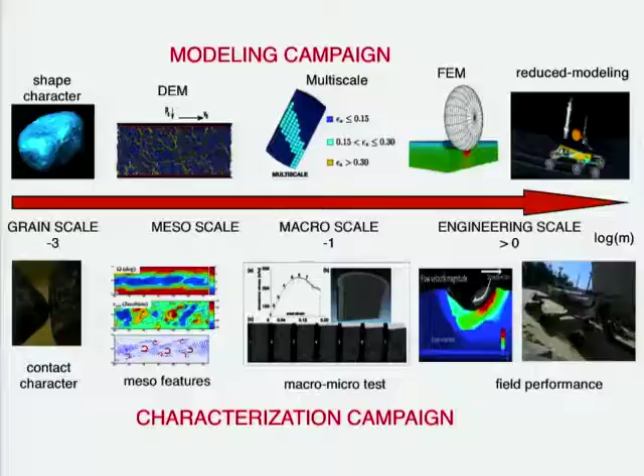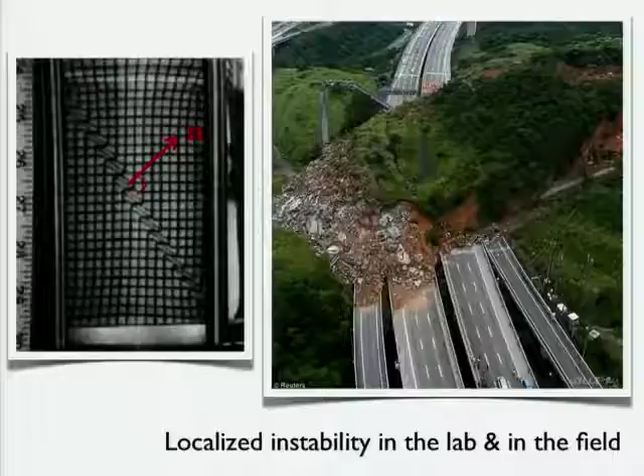And as you saw in the previous picture and in this one, clearly these things interact heavily with your infrastructure and they disrupt life. I mean, this is very inconvenient for this guy that wanted to go home. Very inconvenient. And as climate change advances, as we believe it is, these things will become more and more frequent, okay, unfortunately. So having the ability to pinpoint when and where they will occur is going to become more and more important.

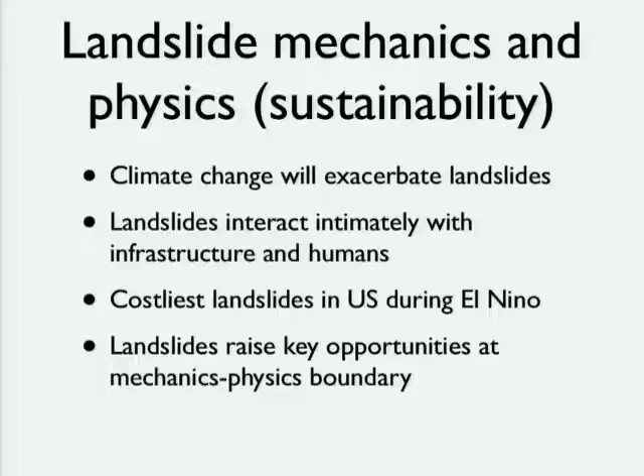Okay, let's get more into the theme of the talk, sustainability and energy. So why are landslides interesting in light of sustainability? Climate change will exacerbate landslides, there's no escape. The more it rains, the more landslides we'll have. They interact intimately with our infrastructure and humans. The costliest landslides in the United States happen during El Nino season, tightly correlated to rainy season. They're beautiful opportunities to look at the mechanics and physics of these very complex, very beautiful materials that play a key role in our lives.

Let me say a few words about cement before we get more into energy. You might not know this, but a fourth of the energy consumed and the CO2 produced in the world is due to producing primary materials—steel and cement, for example. A fourth. Concrete is now the most widely used construction material on Earth. Why? It's cheap, very cheap to produce, and anyone can produce cement anywhere in the world.

And it's extremely versatile. I was reading a book recently where a guy proposes that the Egyptians built the pyramids using cement. I don't know about that, but it's an interesting notion—it really is a very versatile material, and it would have made building a pyramid a lot easier.

So concrete is the most widely used construction material on Earth. If you make a small change in its CO2 footprint, you can have a very big impact, because remember, you're using a fourth of the energy and CO2 to make these materials. China, not the United States, is the largest producer and consumer of cement today, consuming about 50% of our cement. Add the other BRIC countries, Brazil, India, and it's probably up to 80%. So unfortunately, even if we produce the greenest concrete ever in this country, we're not going to make that big of an impact—it's really the BRIC countries that will make an impact if they make any changes.

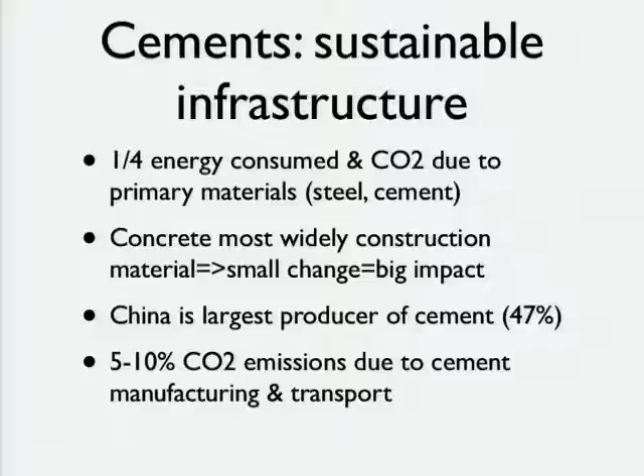Let's start getting a bit more serious here. What are some of the really big energy issues we're facing? Let me show you some data you may or may not know. Energy consumption correlates directly with population growth and quality of life—most people know this. I'll show you a graph of the correlation between energy consumption and quality of life.

The current world consumption of energy is about 16 terawatts. In order to keep the growth we need for our civilization, we need to increase production about 1% per year. If we want to encourage growth in the developing world, say Brazil or China, we need to grow at 2% per year. Now, a growth of 1% a year, which as an engineer I think is rounding error, needs about 160 new nuclear plants. A growth of 2% is twice that.

That's when people say you'd have to build a new nuclear plant every day to sustain growth—many people quote that number, that's where it comes from. Can you imagine that? There are 500 nuclear plants in the world since the invention of nuclear power, and here you're talking about building 160 new nuclear plants just to keep growth, not even to encourage it, just to sustain it.

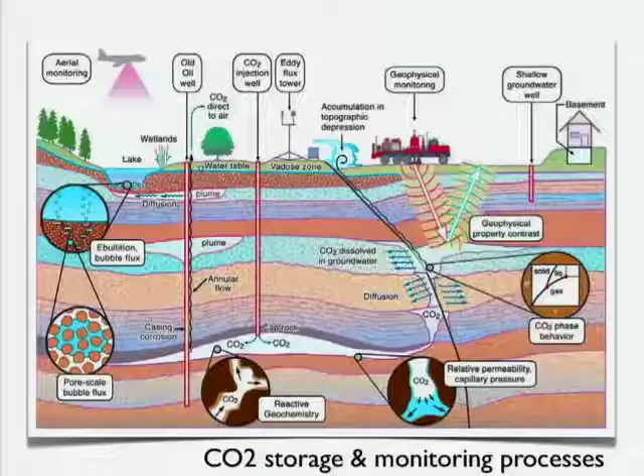So CO2 capture will have to happen sooner or later. You want to capture in decades and store for centuries. You want to go into these formations as potential locations to make these injections, and you have to inject huge amounts of CO2—just huge, 7 to 15 gigatons per year, by the end of a century.

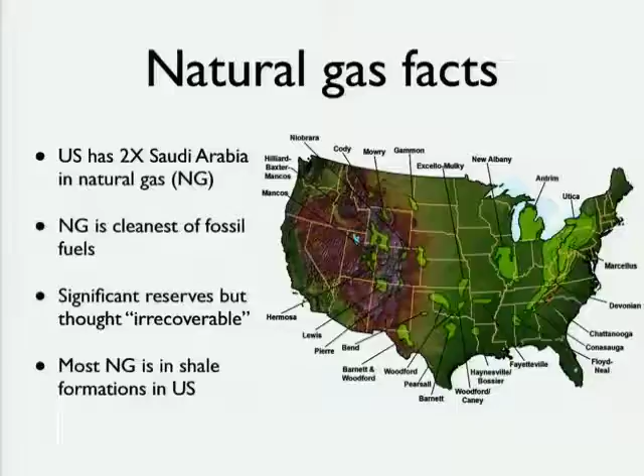There are two technologies that have changed dramatically recently and enabled natural gas to really become a player. The first is called horizontal drilling. It used to be that all your wells had to be vertical, that's the way we did wells. You would go down to the formation and pump the oil out. Maybe if you were pretty smart you'd do slanted drilling. But recently, now you're able to go not only vertically, but actually have an elbow, a 90-degree turn, and go horizontal. And that changed many things.

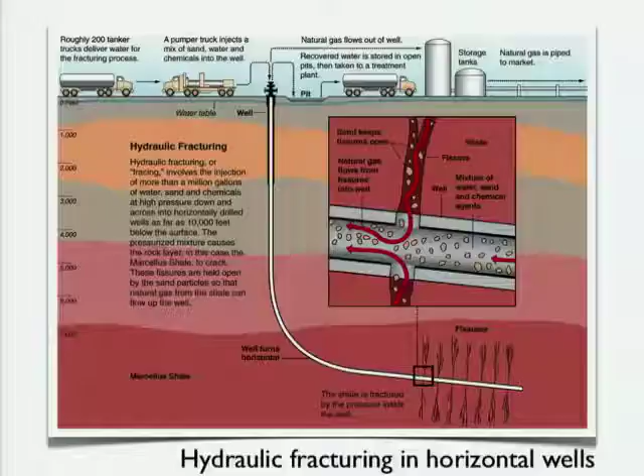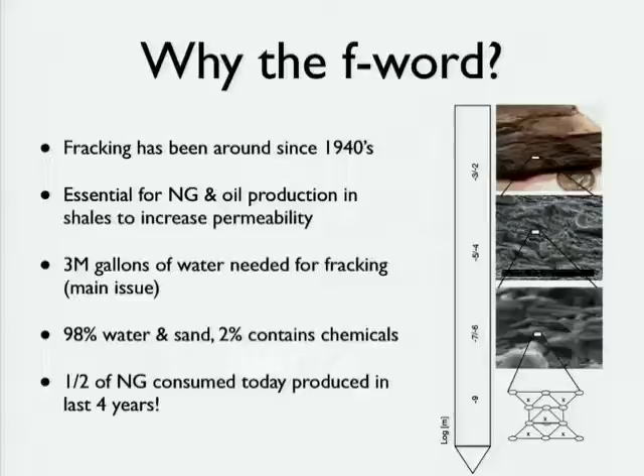So yes, it does happen tens of thousands of feet under the surface, and your drinking water is really up here. So there is quite a bit of a distance there. How many of you have seen water flowing from a faucet which was ignited? Yeah, I saw the 60 Minutes program. Yeah, I did see that. Plus, there's a lot of leakage of methane. Yeah, but I'm going to stop there.

I did see that. The point you made about clay: clay typically forms the cap over formations, right, which is the reason you have oil wells to start with. What's the risk that you fracture the actual cap for your formation and then lose the very product that you're trying to get? Well, I think the general statement is that every time you're fracking something, every time you're changing something mechanically, you're opening the door to things to change, right? And whether it's oil leaking up or creating seismicity or weakening that formation in its ability to sustain loads, you're opening things to change. And what exactly that is going to bring is something that is difficult to establish.

And that's a great way to get to my punchline here, which is that all of these applications, all of them, will require fundamental understanding of what's going on between the flow along these porous materials and their deformation, right? You're clearly deforming them. You're clearly changing them by applying pressures to them. And you're really changing the chemistry. And these things are coupled. They're tightly coupled. They're very complex. And people forget about these things when they're talking energy, right? Everybody thinks that energy is solar panels, right? And it's not, not for the next 2 to 3 decades. There are other issues that we need to start to get serious about.

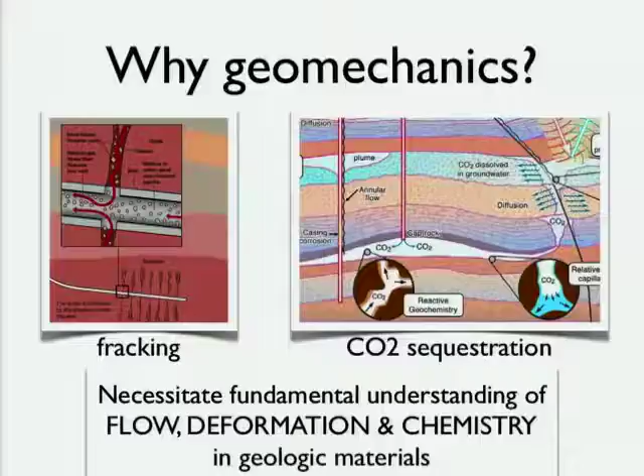I think they're better. It's undeniable that there are better technologies and we have a better understanding, and that's a good point. The key here is not to dismiss these technologies or these sources of energy, but to make them safe. Okay, and that's undeniable. Now, are they safe now? No, I don't think so, and I don't think that people completely understand what they're doing. I'm an engineer, and I know that when you do things in engineering, you need to get the job done. But in order to do it at the scale we need for these new applications, you really need to understand what you're doing, and that requires fundamental understanding. That's my message here. Don't dismiss the technologies. Don't dismiss these possibilities. Just press people to invest more in research so that we can understand what's going on, so that we can have safe fracking and safe CO2 sequestration.

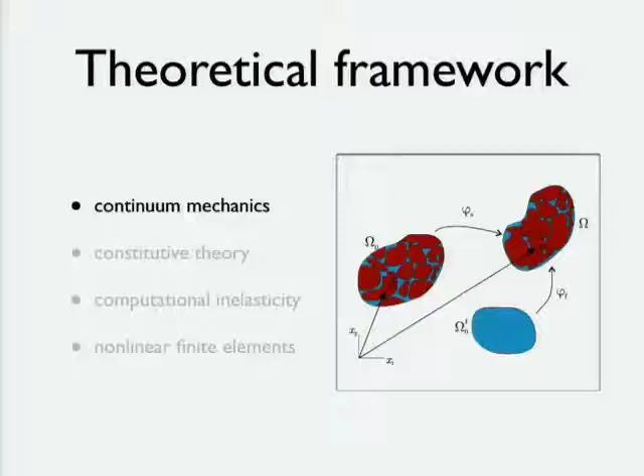So let me just show you cartoons and sketches of the modeling tools. The way we do this is that we view these materials using mechanics or physics. These are materials that are porous. The red things here are, say, your solids. Inside those solids, you have fluids in blue here. They deform. Their deformation creates deformation of the solids and also flow of the fluids. And that's controlled by partial differential equations.

I couldn't get you here to Caltech without showing you an equation. So I had to show you some equations.

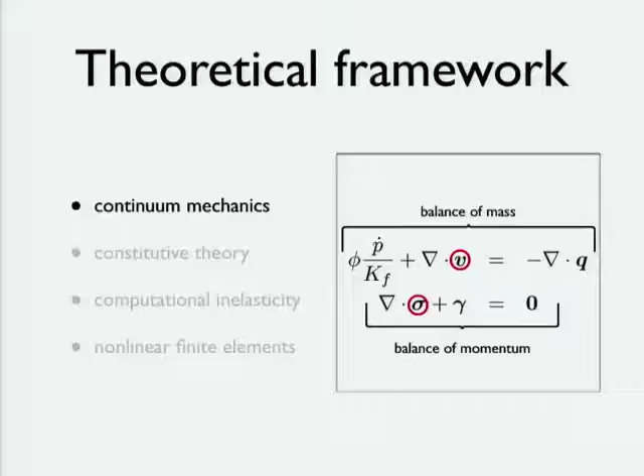So you solve these ODEs or these PDEs that control the behavior of the material that is interacting with the fluids, in this case the porous materials, right? And you need to do this using computers usually, because these equations are pretty difficult. Now here's a key issue. It's called constitutive theory. These kinds of theories tell you how the material behaves.

For example, one of the constitutive theories that is typically used is called Darcy's law. It tells you how fluid flows through porous media due to changes or gradients in head or pressure. And it's controlled linearly by this coefficient here called permeability. So when you hear people speaking about permeability, they're speaking about this constant that relates how much change in head or pressure you need in order to push a fluid through a porous material. The more permeable you are, the easier it is. The less permeable you are, the more difficult it is.

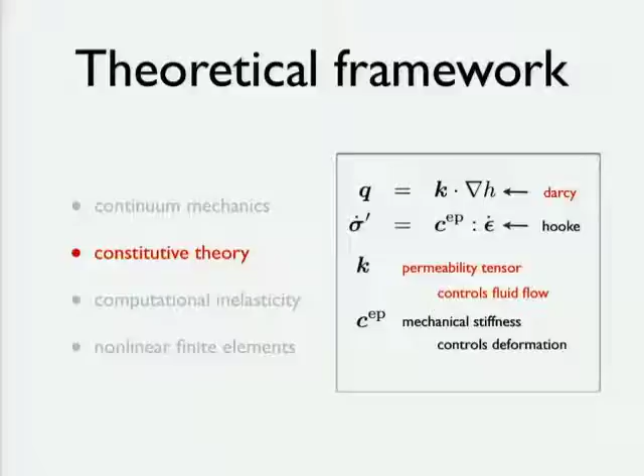These so-called laws are typically obtained phenomenologically, heuristically. Someone gets into some lab, does 3 experiments, measures this, observes that. Now, the new applications that we're talking about, fracking, CO2 sequestration, nuclear repositories, and so on, require that we know permeability from a much more fundamental notion than just phenomenology. So I'm going to be showing you some of that. How do you get permeabilities in a much more fundamental way?

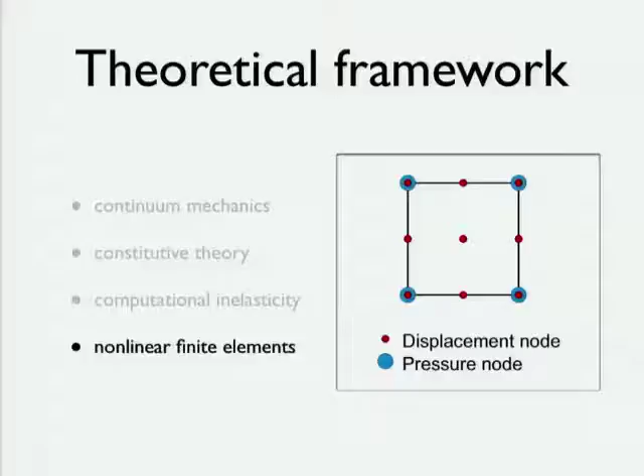I'll skip that. And finally, you need, say, finite elements to integrate all of this at the engineering scale and solve boundary value problems or engineering problems. So that's the theory. Let me show you some applications. No more equations, I promise.

So let me show you one application that DOE was very interested in, because it relates a lot to these issues that we're talking about. This is an academic application, but you'll get the point. So remember, I told you that flow is extremely important in these applications. You're trying to extract fluids from these formations or inject them.

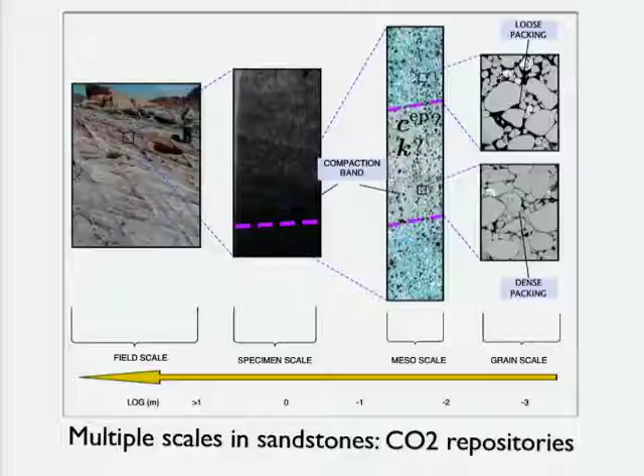So let's take a trip to Chicago. This is the synchrotron facility from DOE in Chicago, Argonne. It's a beautiful facility. And here I'm going to show you an application of using this technology to really get an answer like never before to fundamental questions like what is the permeability of these formations, really from a fundamental point of view rather than phenomenology or guesswork. So let's see how that's done.

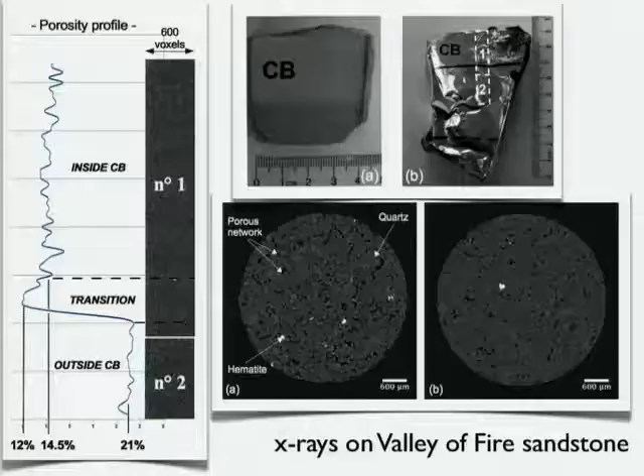And people could show you all these pictures; they have been available for the last 5 years. People have been taking beautiful pictures of these formations, showing that clearly there's a difference in porosity, but no one can ever say what's the change in permeability. So in order to do that, you need to do a little more work.

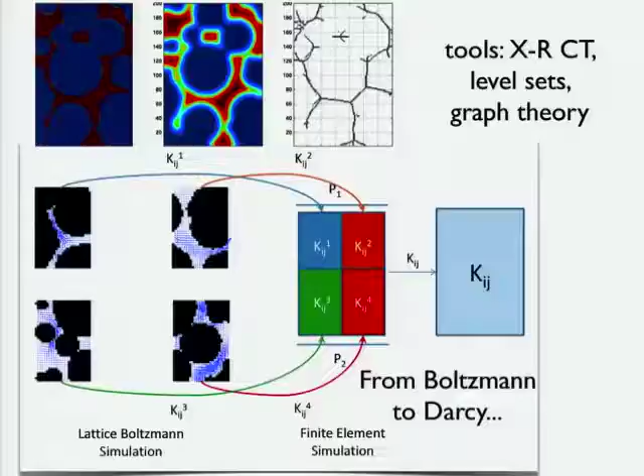So our goal here is to go from Boltzmann to Darcy. Boltzmann, or lattice-Boltzmann, is the method that people use in order to compute flow at the pore scale level. And Darcy, remember that Darcy equation that I showed you, is the equation that people use to compute flow at the macroscopic level. So you want to go from the pore scale physics all the way to the continuum macroscopic physics, where engineers are really determining how much oil they can extract from this formation. So doing things at the pore scale is useless if you cannot scale them up.

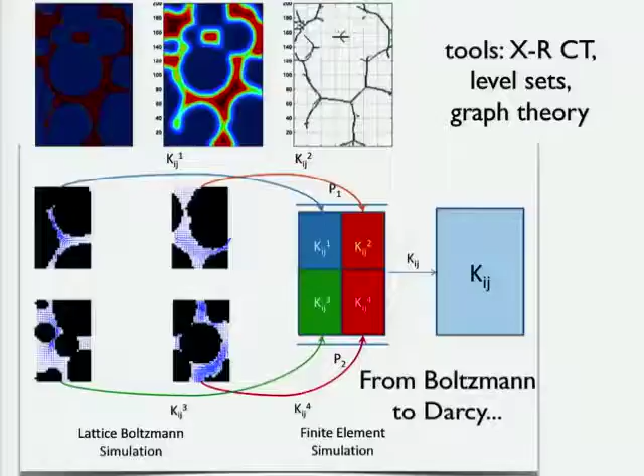So we have come up with procedures that can allow us to push things up, building these sophisticated mathematical tools. And the goal here is to understand injection, withdrawal, and storage of fluids, of course, in this porous media. OK, I'll skip that. Let me show you other things that you can get from these methods.

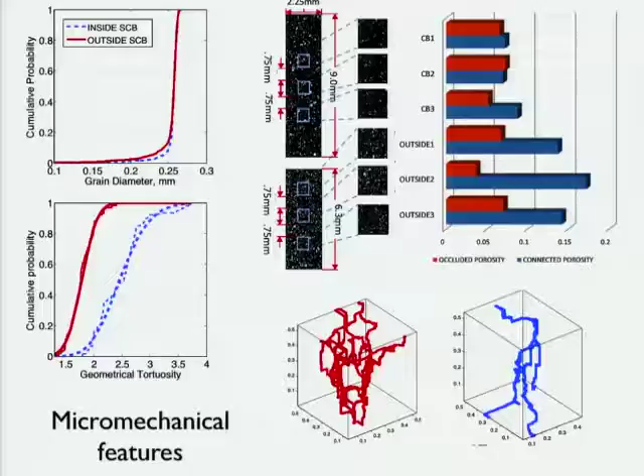Now, this is probably my favorite picture from all this study. You have two kinds of porosities. Again, connected porosity and occluded porosity. Connected porosity is useful porosity, good porosity. Occluded porosity is useless. It doesn't take you anywhere. Now, you can see that the connected porosity is reduced quite a bit inside of a compaction band relative to outside of a compaction band. And that's the one that is controlling the permeability.

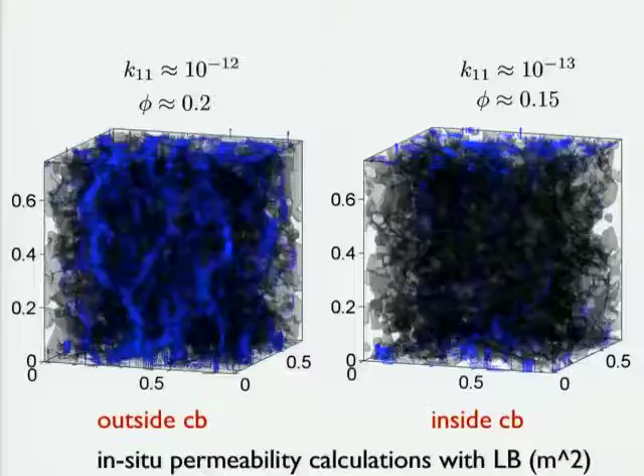It's only 1 order of magnitude, even though you have changes in porosity, say, from 20% to 15%. So there are changes, but they're not as dramatic as people thought they were. And now this is not a speculation. It's an actual fundamental measurement of the permeability. So we're able to do this. We're able to piece them together, all of these little cubes. We piece them together into larger and larger specimens, and we're able to see what the permeability is at the larger scale. OK.

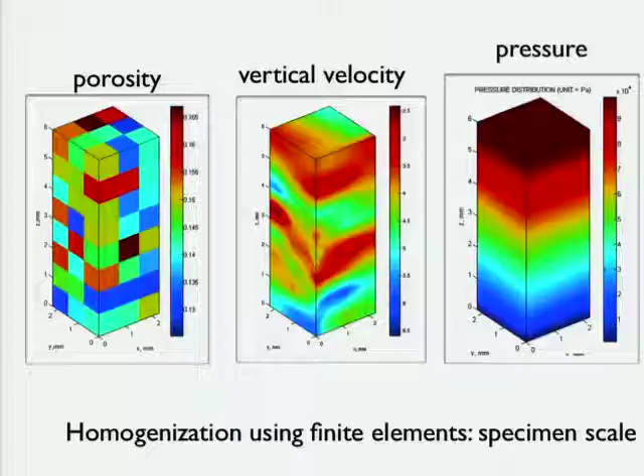Yes, sir? In doing the flow calculations, do you have to take into account zeta potentials and sort of the microfluidic surface to volume issues? We don't take that into account. We do take into account friction between the fluid and the solid, but that's about it.

Now, let me take you to France, to the European Synchrotron Radiation Facility, ESRF. And this is the other synchrotron in the world. So there's the Argonne, there's the European, and they're very powerful. And here I'll show you some things that we're doing that go from Newton to Cauchy in terms of deformation, real quick before we close.

So the idea here is to understand how these materials behave, again, from the very low scale, in this case the granular scale, all the way to the continuum scale. These granular materials are controlled, remember, by the interaction between the grains. And if you could see those interactions, perhaps you could extract what we call the micromechanical state. And then from that micromechanical state, you could come up with some key variables, let's call them plastic internal variables, that control the physics at this scale, and then pass them to models that take those variables and can tell you what the behavior of the material is at the continuum model scale.

So you're coarse graining, if you will. You go from something discrete, from Newton, from F equals ma type interactions, to something continuum where Cauchy stresses and things like this control the behavior of the material. Yet it's the same material, so you're trying to extract information from its discrete reality to some abstraction that looks continuum. So how do you do that? You go to a synchrotron facility, and you do experiments, for example.

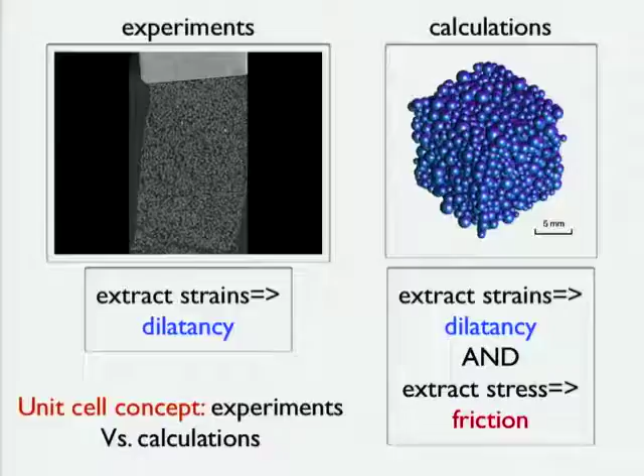This is a cross-section of an experiment. It's about 2 centimeters high by 1 centimeter in diameter. It's being compressed as you watch this movie. Okay? And what you see here are grains of sand that are moving in real time as you're compressing this sample. So what's going on here? So let's do a zoom in here. This is more details of that experiment.

So this is a cylindrical sample. You're seeing half of that here in 3D, with thousands of sand grains stuck into a little chamber in the synchrotron facility and being pancaked, if you will, in the vertical direction. And as you're doing this, you're reading in the usual way forces versus deformations macroscopically. But at the same time, you're shooting X-rays at this thing, and you're watching how grains move from stage 1 to stage 2.

All of these are stages where you took a tomography of the sample. And you're doing it at sub-grain resolution. So this is like 6 micron voxel resolution, whereas your grains are about 0.5 millimeters in diameter. So you have hundreds of voxels per grain in resolution. And you're pancaking this thing, and you're taking X-rays. So you can see where each and every grain goes from one stage to the next. You can get the kinematics of every single grain in a way that it's never been done before.

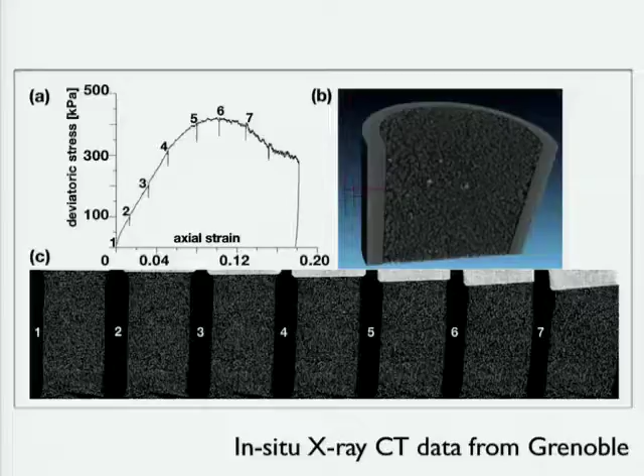Now, experimentalists are very excited about that, but engineers keep asking, well, what do I do with that? That's beautiful, but what do I do with all these little grains moving from one place to the other? Give me something useful. So that's where we come in. We take this data and we make it somewhat useful. We extract these kinematics that I'm telling you about. These are displacement fields that you get from this data.

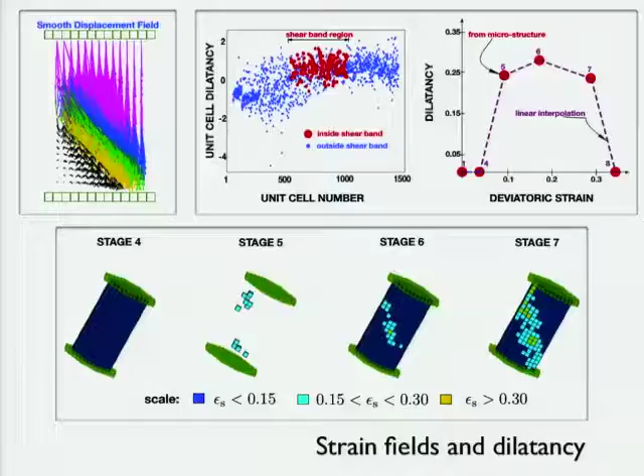And you start extracting information. For example, one key piece of information that we like to extract is called dilatancy. And then we use that evolution of dilatancy, here's a curve showing you a typical evolution of that dilatancy, to construct models. Now, here's the experiment. So here's the sample being pancaked. And it forms a shear band, and it shears quite a bit here once it starts to fail. And what we do is we construct mathematical models that we call multiscale models.

Here's that model, using finite elements and the displacement data the French get from their beautiful experiments, building mathematical models that compare well with the experiments. This is the deformation of the experiment, and this is the deformation of the model, and they're pretty close to each other. Yes, we're missing some pockets of accumulated deformation, but all in all, we're not doing that bad.

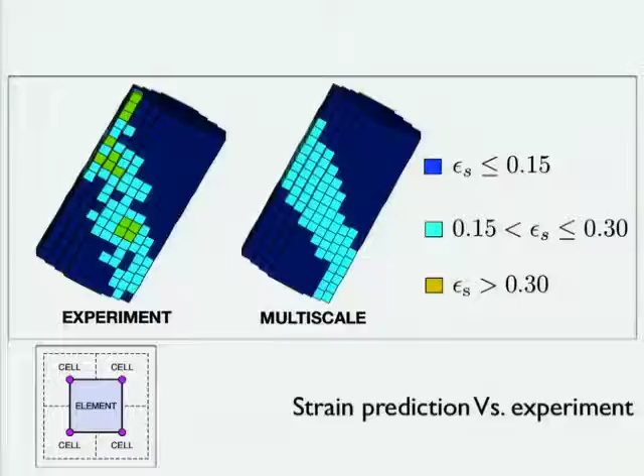OK, we're getting close to the end. Let me just show you a few slides about cements. Remember, cements are very important because we produce a lot of it, and if we keep growing at the rate we're growing, we will need to pour a lot of cement in this world.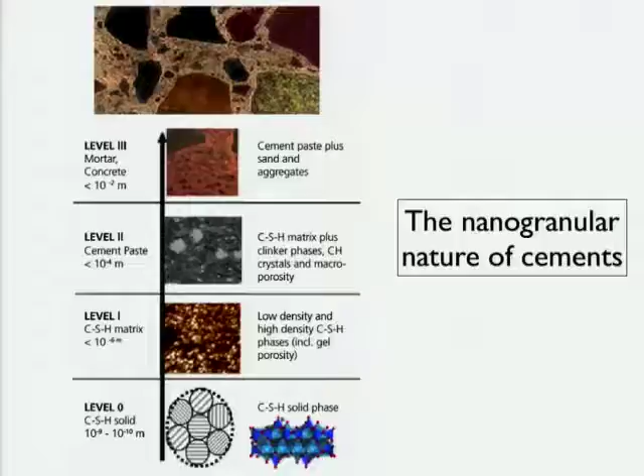So at level 0, there's this theory that says concrete or cement is globular or granular. These grains interact with each other and control the behavior of these cements. So what you can do with that information is go to that nanoscale - here's a model using that nanoscale structure of cement.

This is a supercomputer simulation of a nanoindentation experiment. Here's the tip of a nanoindenter pushing down on a sample of cement, and what you see here in color are stress chains - you're clearly stressing the area around the tip of the indenter.

Now, this exact same experiment was conducted at MIT physically - there was a physical experiment. The yellow points here are the results of that physical experiment. In nanoindentation, you measure a couple of parameters: hardness and indentation modulus. We're testing two kinds of cements here, one at lower packing fraction and one at higher packing fraction. You can see the yellow results show a certain spread in the test data.

Then we come with our supercomputer model and make a prediction of what the hardness would be and what the indentation modulus would be for those same packing ratios for this cement. These are our predictions in blue, from the mathematical supercomputer model, without fine-tuning, without calibrating the model - to make a true prediction. You can see that the data is not too far away from, let's say, quote-unquote reality, if you can believe results from MIT, that is.

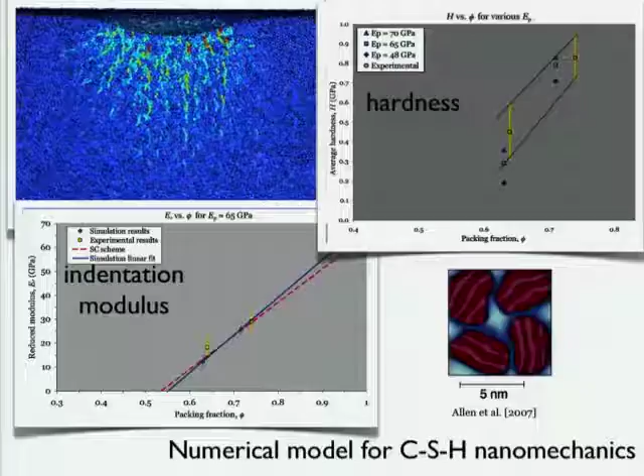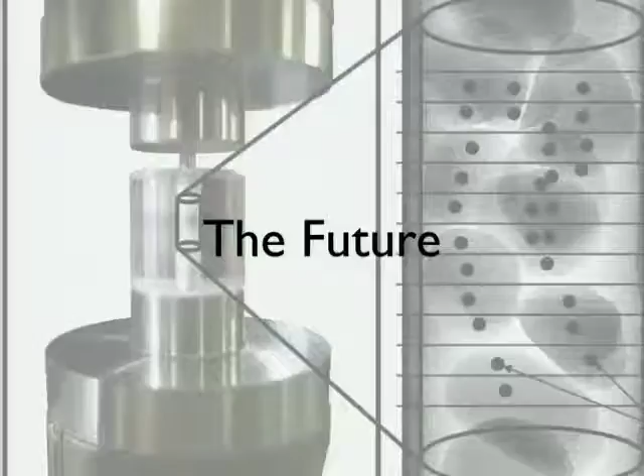So we're getting close to the end. Let me just show you what I think the future brings in terms of fundamental research, not really technology. I'm not going to tell you what stock to buy, but you can probably guess.

Really, the next frontier is to go to chemistry and link that chemistry with mechanics. This is a beautiful animation from one of my postdocs - it's like a sugar cube being diluted in water. But here is the real pore structure of that sandstone I showed you, imaged in the synchrotron in Chicago, and you can see it diluting there in a reactive fluid.

So if we could take these chemistry tools that are working by themselves at this point and couple them with mechanics - pressure, for example, will alter how quickly chemical reactions occur, and chemistry also will alter mechanics. Clearly you see that pore structures are changing, which will alter the way fluid flows, and so on. So they're clearly coupled. Where we're going now is to really put together chemistry, flow, and mechanics to take a close look at fundamental processes, like what's happening when you do fracking - when you have all of these processes together, what are you exactly doing?

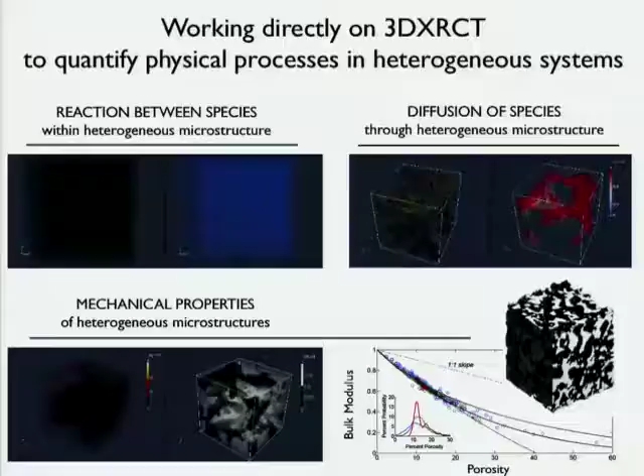And perhaps if you understand that, you can engineer a new type of fracking that requires less water or perhaps less chemicals. Another very exciting area is computer-aided modeling.

It's hard to see from this image, but I can see it better on my monitor. What you're seeing here on the left looks like a Lego model, but it's not—it's a CT image of a grain of sandstone. CT imaging is becoming mainstream in many applications, particularly in geosciences, and many oil companies are now investing a lot of dollars in getting these images to extract beautiful tomographic images at the grain scale.

But as I told you before, these images are useless if you don't know how to put them into a framework where they can give you quantitative answers. So what we're doing here at Caltech is taking these beautiful images and taking them to the next level. For example, this is a mapping of the curvature of this grain using level sets, to really see the topography of the grain. And over here—unfortunately you can't see it—this is a mathematical, functional representation of the geometry of that grain using brand new technology.

So now, that's much better. Now you can see—you can capture grain morphology using mathematics in a way that no one has ever done in the past, right?

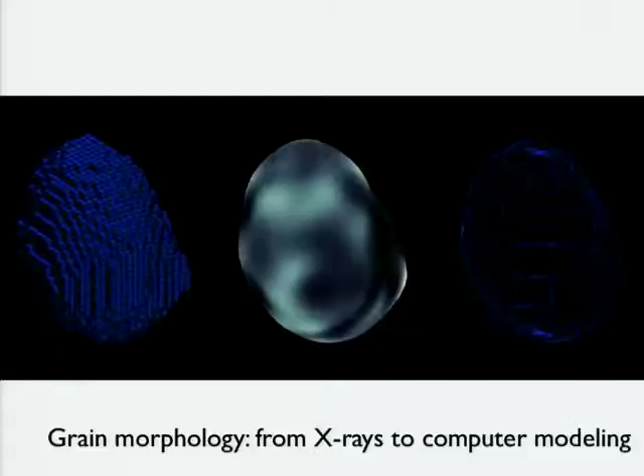So now you can go from a beautiful, artistic representation of a material to a mathematical model that you can insert into a computer and use for simulation to get real quantitative answers. That's not so much the future, it's very much the present. I think these models will play a bigger and bigger role as we start doing more complex applications, as we need to do for CO2 and for fracking.

Okay, so let's leave some minutes for questions.

Let me finish by saying I hope you've gathered that these geologic materials are very, very important in the energy equation. They're neglected, unfortunately, but they're terribly important. We need to understand the coupling between deformation, flow, and chemistry in these materials in order to continue to extract fossil fuels as we move forward.

So if there's a message you can carry to your congressman, it's to invest more in basic research, so that we can understand the deformation, flow, and chemistry. The good news is that here at Caltech, we're developing models that are really allowing us to understand these coupled processes, and hopefully, with enough understanding, we'll be able to invent new technologies. Thank you very much. I'll be happy to answer any questions.

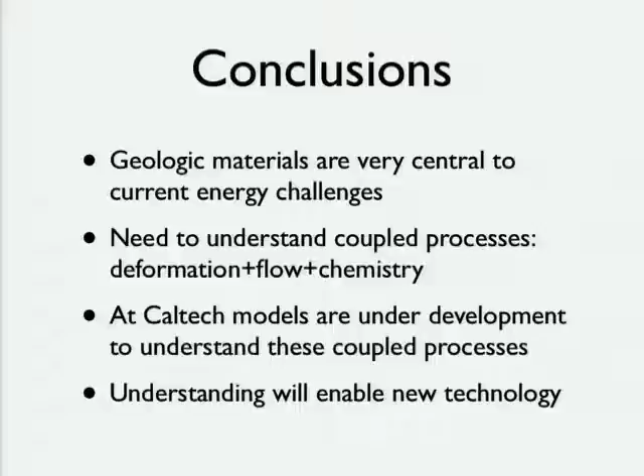How much gas gets left in these fracked wells? Is there anything you can do to improve the efficiency of extraction? I don't know, but I have some numbers for oil—I think something like 50% or a little more of oil that's easily recoverable just gets left behind because it's better to go to the next one.